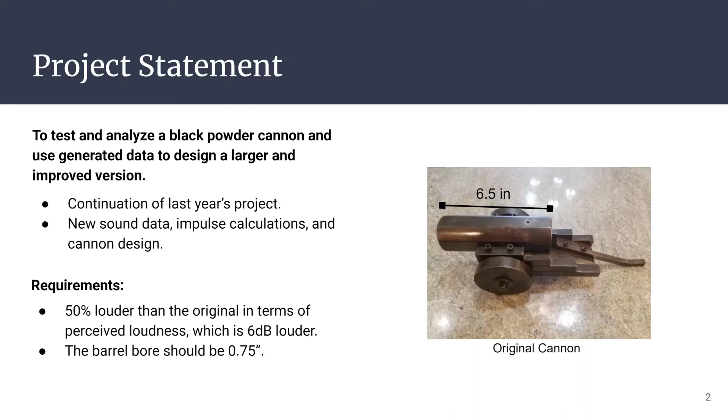This picture shows the original cannon, which was built by our sponsor when he was in high school. A senior design team worked on this project last year, however their results were inconclusive. Our objective was to take more accurate sound measurements, refine the impulse calculations, and design a new cannon with the following requirements. The new cannon should be 50% louder than the original in terms of perceived loudness. The bore diameter should be 0.75 inches compared to the 0.5-inch diameter of the original, and the new cannon will be made of 4140 medium-carbon alloy steel.

Now to our testing. Our testing setup included a wood log that the cannon is aimed at in order to stop the projectile which is fired from the cannon, a digital chronograph which measures the speed of the projectile, a halogen lamp which allows the chronograph to function properly, the cannon itself, a steel pipe which acts as a guide for the projectile as we fired 6 feet from the chronograph, stones which shield the chronograph and stabilize the pipe, and an accelerometer to measure the acceleration of the cannon when it's fired.

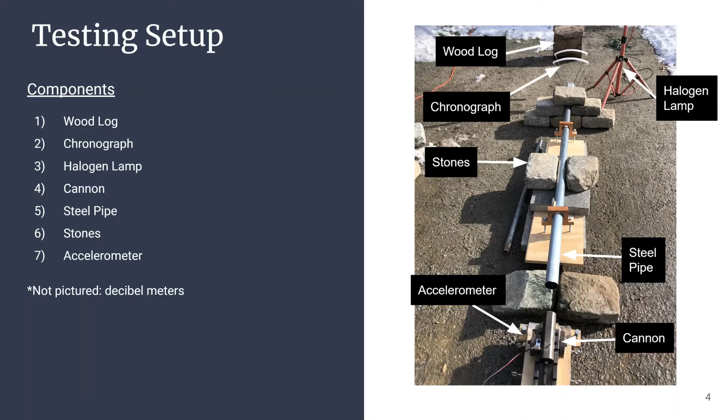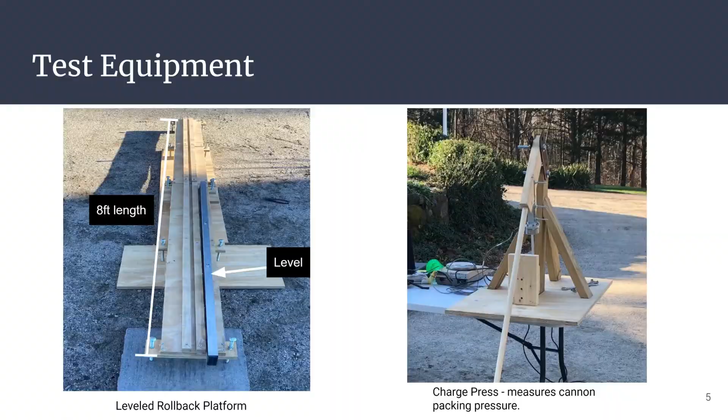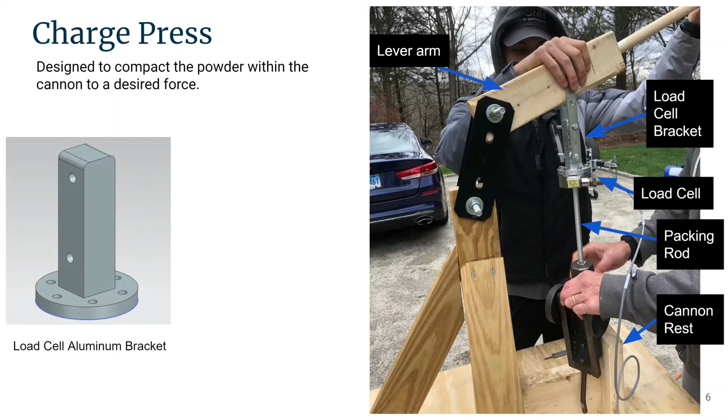Test equipment we constructed includes an 8-foot-long rollback platform which minimizes the cannon's rolling friction and keeps it moving in the axial direction, as well as a charge press. The charge press was designed to compact the powder within the cannon to a desired force in order to consistently control this testing variable. On the right we see the components of this device. The load cell bracket was designed to connect the load cell to the charge press lever arm, which can be seen in the assembly image.

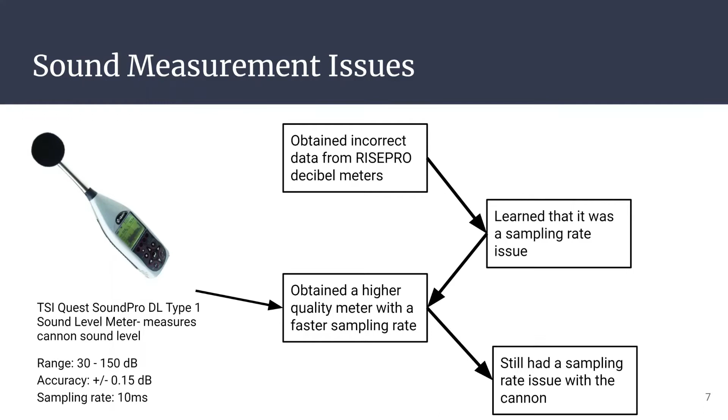We first measured the cannon's sound level using RISEPRO decibel meters, but collected inconsistent and incorrect data. We learned that this was due to a sampling rate issue with the decibel meters, so we obtained a higher quality TSI decibel meter to perform further testing, but we still ran into a sampling rate issue and we were not able to obtain reliable data. Now we will move on to the results from cannon testing, but first, here are a few clips of the cannon firing.

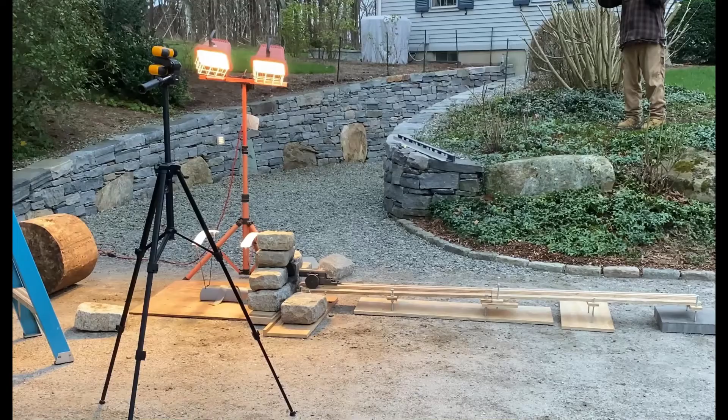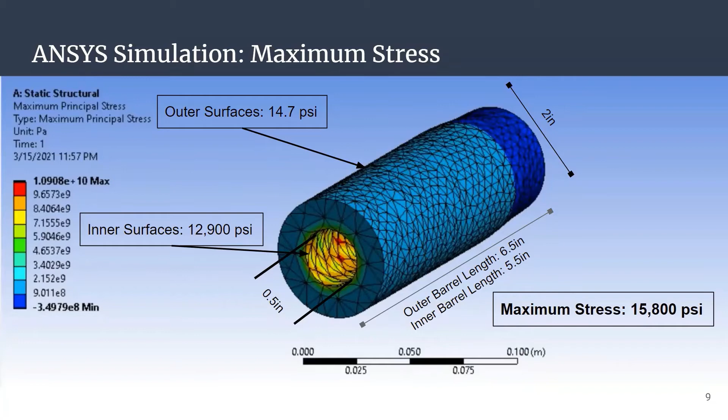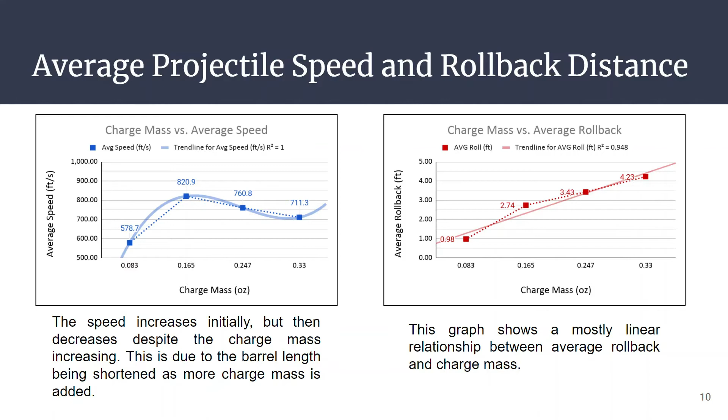ANSYS was used to simulate the maximum stress the barrel experiences during firing. Our barrel, which has a 1/2-inch bore, 3/4-inch barrel thickness, and 5.5-inch inner barrel length, experiences a maximum stress of just under 16,000 psi. Here on the left is our testing data on how the speed of the projectile changes based on the charge mass used. As you can see, the speed initially increases with the charge mass, but then, because the barrel length is decreasing with more charge mass being added, the velocity of the projectile is reduced. Here on the right, we see a mostly linear relationship showing that the rollback increases as charge mass increases.

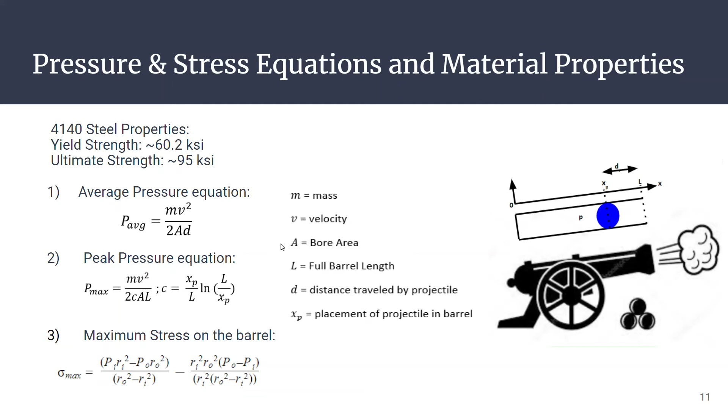The following material properties and equations were used to further our analysis of our testing data. First, we have the average pressure equation, which is derived from the impulse equation. This tells us the average pressure in the cannon for a given projectile velocity. Next, we have the peak pressure equation. This equation is derived from the average pressure equation and the ideal gas law. This gives us the peak pressure within the cannon for a given test, and it is this value that is used for the maximum stress equation. Our third primary equation is for the maximum stress on the barrel, which is a function of the inner and outer pressure and radius. This represents the hoop stress for a thick-walled pressure vessel. In this equation, we use the peak pressure to find the maximum stress, which is then used to calculate the factor of safety.

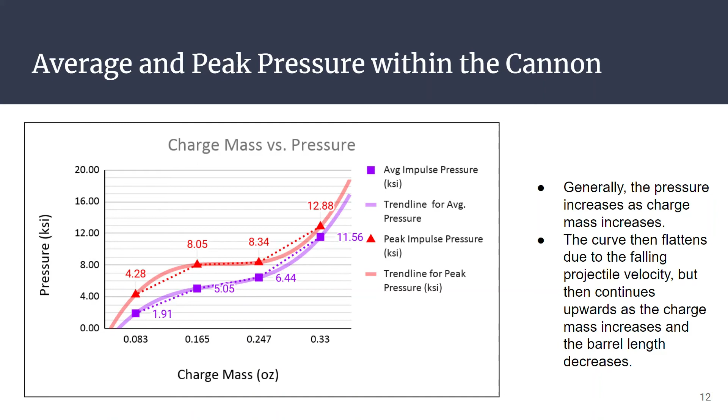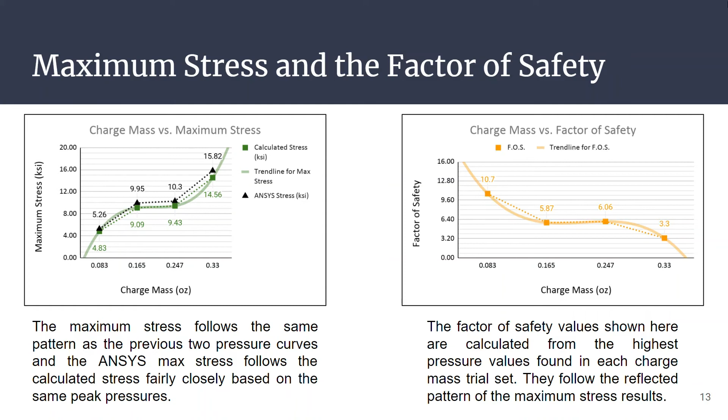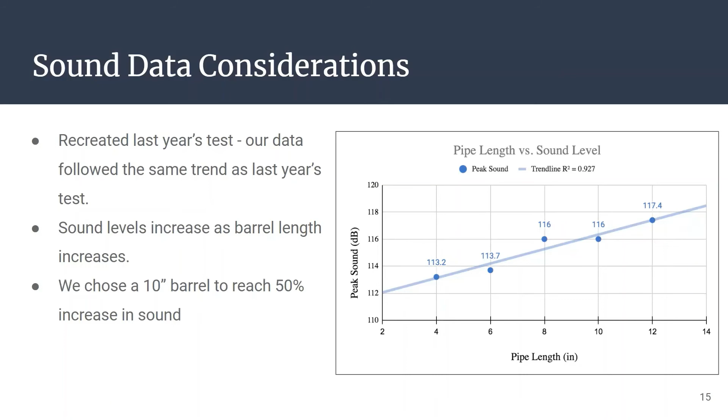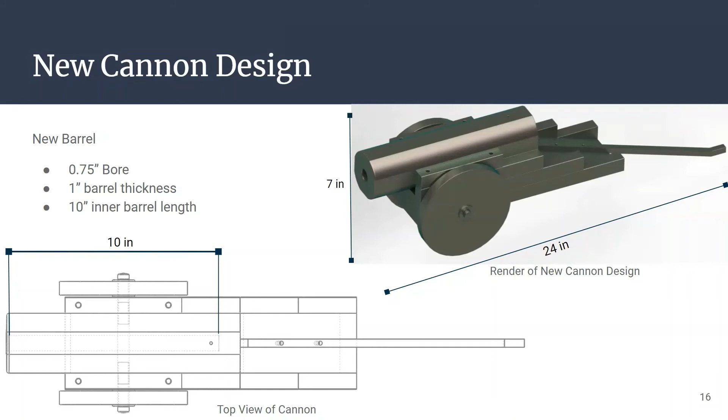Based on our data collection, to meet the new requirements, our new cannon will have a 3/4 inch bore, 1 inch barrel thickness, and 10 inch inner barrel length. Overall, the new cannon will be 7 inches in height and just under 2 feet in length. When designing and determining new dimensions for the new cannon, we have to consider the factor of safety in two critical design elements. The first is the factor of safety on the barrel. Since it is not possible to determine the exact velocity of a projectile in the new barrel, we conservatively designed the barrel to comfortably operate at higher than peak velocities previously found in the original cannon, which resulted in a 1-inch thick barrel wall. The new barrel will have at least a factor of safety of 4.5 for velocities lower than 1,000 feet per second.

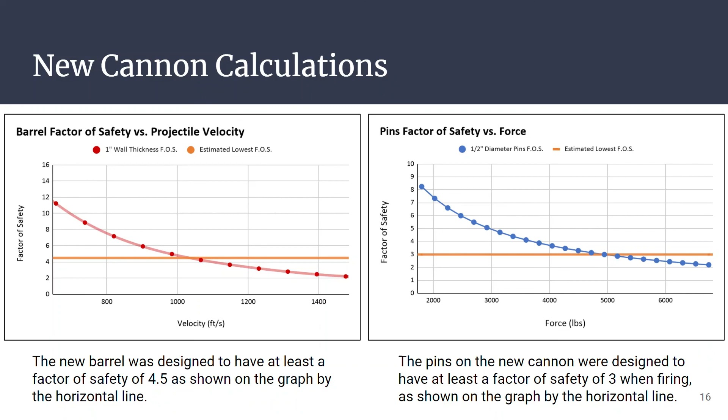The second factor of safety considered was that of the pins that hold the barrel in place. Again, since an exact velocity, therefore force, is not known, the pins were also designed to operate comfortably at 5,000 pounds of force, which corresponds to 1,000 feet per second projectile speed with our 1/2-inch diameter pins. The horizontal lines on each graph show the lowest estimated factor of safety. The overall goal of this project was to collect data on our current cannon and safely make a larger cannon that is 50% louder. We had a lot of fun along the way, but also learned it is very difficult to measure the peak sound levels of cannons.